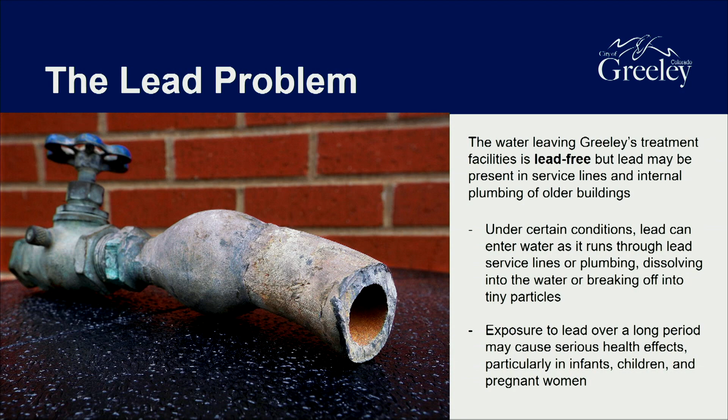So yeah, as Michaela said, historically some of the water service lines in Greeley do contain lead. And just to really point out that if you have a lead service line, that lead is not necessarily leaching into the water. It happens under certain conditions. But obviously we'd rather not have lead pipes there in the first place, so that's not a possibility.

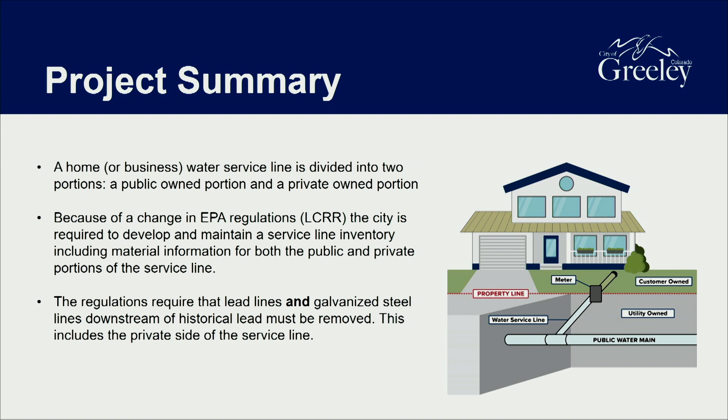So because of a change in EPA regulations, the lead and copper rule, the city is required to develop and maintain a service line inventory, including material information for both the public and the private portions of the service line. So historically, we do not have records for the private side of the service line because it belongs to the homeowner, but now we're required to do that. So the regulations also require that lead lines and galvanized steel lines downstream of historical lead must be removed. This includes the private side of the service line where it hasn't been done before.

And just a heads up on the galvanized steel. So the galvanized steel can absorb lead and then re-release it in the future. So that's why the galvanized steel has to come out as well if lead was previously upstream of that galvanized steel.

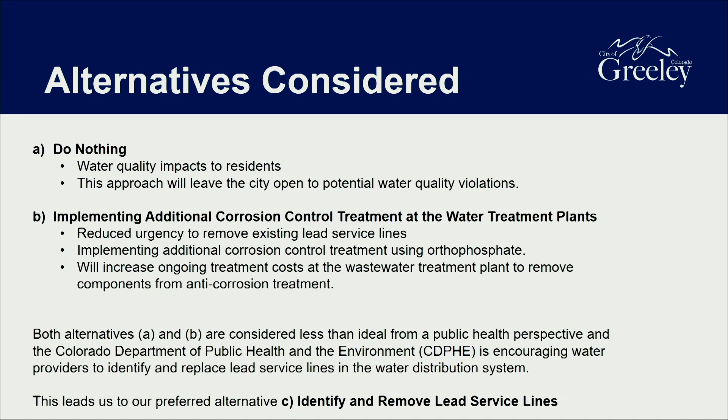Essentially, both these two alternatives are considered less than ideal from a public health perspective. We're essentially being encouraged to identify and replace lead service lines in the distribution system. So our preferred alternative is to identify and remove those service lines. Okay, so here we go, the preferred alternative.

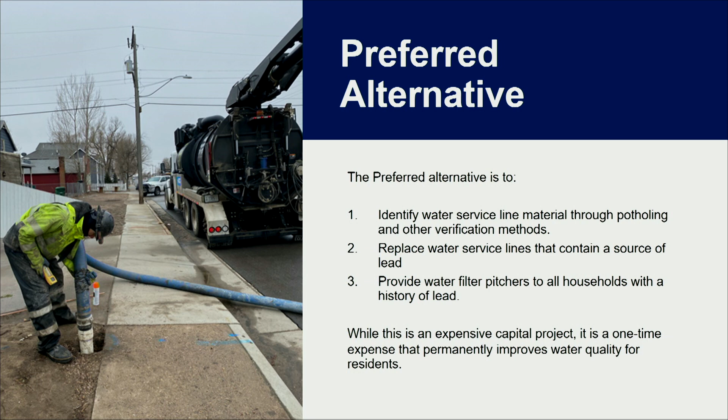To protect public health during this process, we are providing water filter pitchers up front to all households with a history of lead. And while this is an expensive capital project, it's a one-time expense that permanently removes those lead sources from the system and improves the water quality for residents.

So the map you can see now outlines our preliminary plan for potholing and doing removals and replacements for service lines. You can see the small bubble there in the red area is where we've completed potholing already, and we're now moving on to the replacement phase for that small bubble. But beyond that, we're looking to do the red color phase in the rest of 2023, the green area in 2024, the blue area in 2025, and then the rest of the city later on in 2025. That's if we have the funding in place to move at that pace.

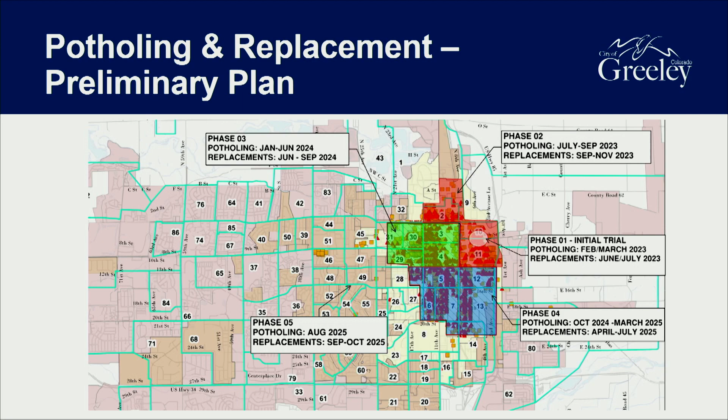So looking at the budget, if we have the necessary funds, this will be a 3-year project costing between about $19 and $23 million to do the potholing, to do the replacements. So the vast majority of that money is in replacements. It's $15.8 million, around $4 million for the potholing, and then around $1.6 million in other costs.

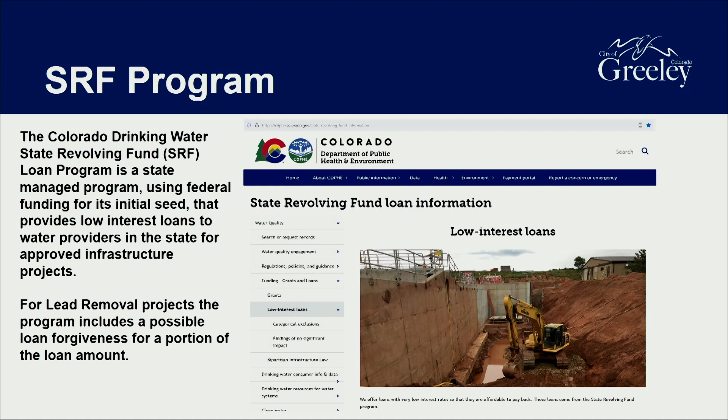So to help offset some of these costs, we are pursuing funding through the Colorado Drinking Water State Revolving Fund Loan Program. This program is managed by the state to distribute federal funds and essentially low-interest loans to water providers for infrastructure projects. For lead removal projects, the program does include a possible loan forgiveness for a portion of the loan amount, which will help us save some money, hopefully.

In terms of projected rate increases for this project, to fund the preferred alternative of removing lead service lines, it would require a roughly 3% rate increase, and that would be assuming we do not get any loan forgiveness through that SRF. In comparison, I believe it was alternative B, to install additional corrosion control treatment, that would actually drive a rate increase of at least 3% on the water side and an additional 0.5% or more for wastewater to remove those additional nutrients.

With the SRF loan, we would essentially be able to reduce the rate needed to 2.5%. Either this, or we could also use those funds to invest in other capital projects for cost saving.

So this construction project is, by its very nature, in the older areas of the city. The older properties are the ones that are more likely to have a lead service line. And so construction will be in areas of the city with historically significant buildings. As such, the State Historic Preservation Office, or SHPO, as we've been calling it, will conduct a review to determine the effects on historical properties and archaeological sites, and may seek alternatives to avoid, minimize, or mitigate these. So the city will be having someone do this historic investigation, and then we will be using approved methods to mitigate the risk to historical buildings.

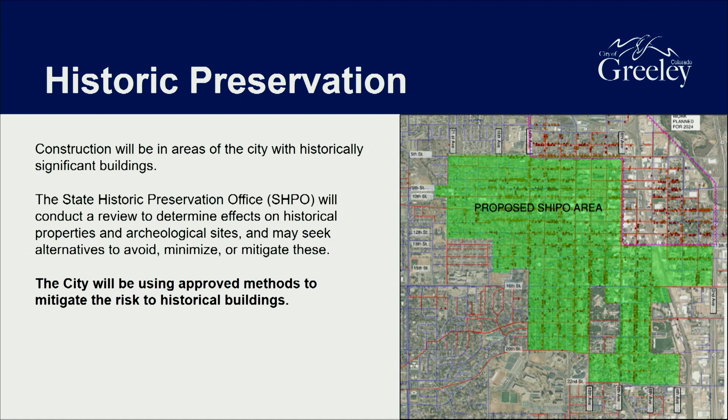And then in terms of environmental impacts, this project will have a minimal impact on natural areas. The project is exclusively in urban areas that have already been developed and disturbed from their natural state. So we're looking at the service line that's between the road and the property. So we are digging holes in the road or out the front of a house where the land has already been disturbed and developed.

So in summary, the preferred alternative that the city of Greeley is pursuing is to identify and replace service lines that contain a source of lead. This project is expected to take a number of years, likely 3 to 4, depending on funding. We will provide those homes we determined to be most at risk with a water filter up front and replacement filter cartridges until their line has been removed, and then 6 months following.

This project is expected to cost approximately $21 million, and we are pursuing state funding through the SRF program to reduce the cost to ratepayers.

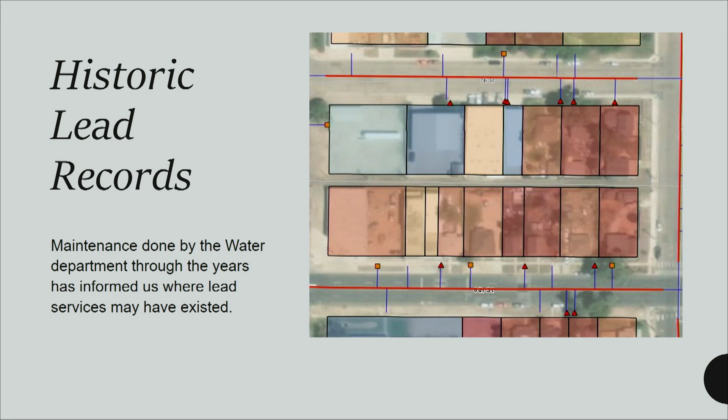This layer's spatial data is created from the efforts of the water shop going through and replacing lead as they found it, as they were doing other projects. So if they were going through and lining a water main, they would record when they found lead and replace it. This has been important for us to know areas of the city to target as we continue expanding our initial phase one area, just knowing where we may find lead by knowing of its existence in the past.

We have found a correlation between how much your valve turns to the stop box going to the meter and potentially the material that lies within. If a valve turns 360 degrees, we have about a 92% chance of that being lead. If it turns a quarter turn, then most likely it's made out of copper or a safe material.

We are currently using Field Maps, which is a mobile application that our field crews can use on their phones to track this data in real time. So as they go out into the field and turn valves, we have up-to-date data as it comes in.

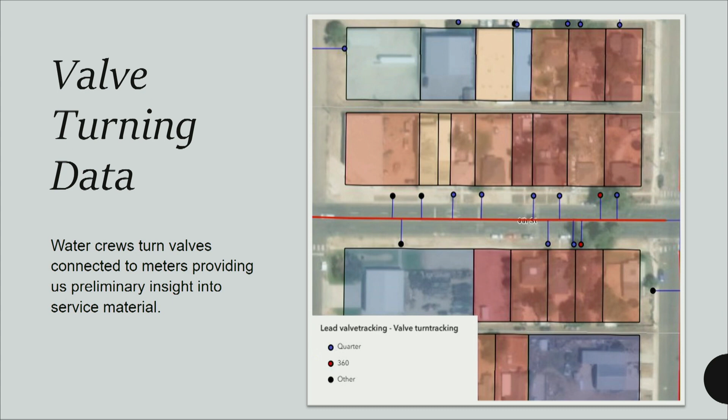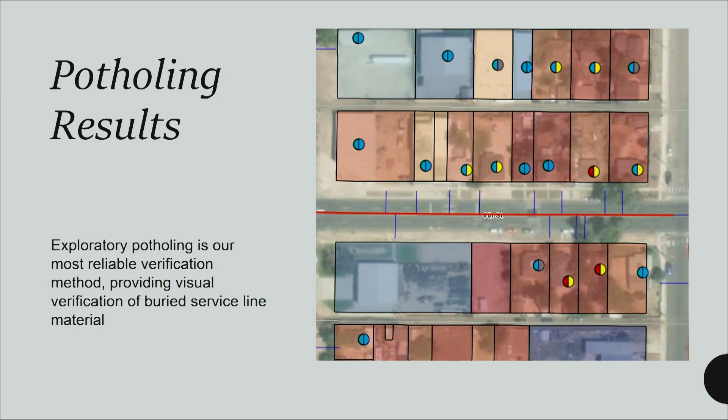And lastly, all of this data culminates into our last spatial data set, which is the replacement phase. We use these maps to identify hotspots, streets that we can disturb only once by replacing as many services on it as are needed, and just using the data that we have to inform our decisions. It is my hope that by the end of this project, everything is blue and green and very boring.

Our last and probably one of our biggest initiatives right now is the material survey. We've mentioned it a few times, but it is also an application or a web-based survey that anyone can do on their phone or computer. It is important for us to gather information on the customer side of the service line, an area where we are right now sorely lacking information. As many surveys as can be submitted is welcome. We would not turn down the opportunity to have that data.

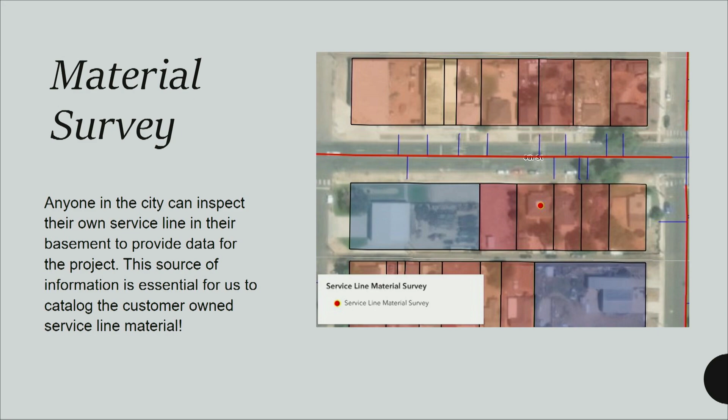If you have questions about what your material is, then the survey itself walks you through identifying your material, even if you're not sure about it, different tests that you can do to see if it's lead or a galvanized steel or just a copper pipe. You do not need to be the owner of the property that you're living in order to fill out the survey. Just having the data is enough for us.

We also have a QR code which is distributed on many of our pamphlets, letters, material that we hand out. By taking a picture of this QR code, it will take you to a website where you can fill out the survey. And I'd like to walk you through that survey right now. So when you come up to the survey, I'm just going to give a short demonstration of how it works. We have options for both English and Spanish, which have been translated through the city. We'll go through the English selections, because that's what I understand.

You'll have a very short introduction to the survey, introduction to the project for those who are not familiar with it, and the importance of why we are doing this. We have graphics to kind of tell you if you may live in a home that is prone to lead services.

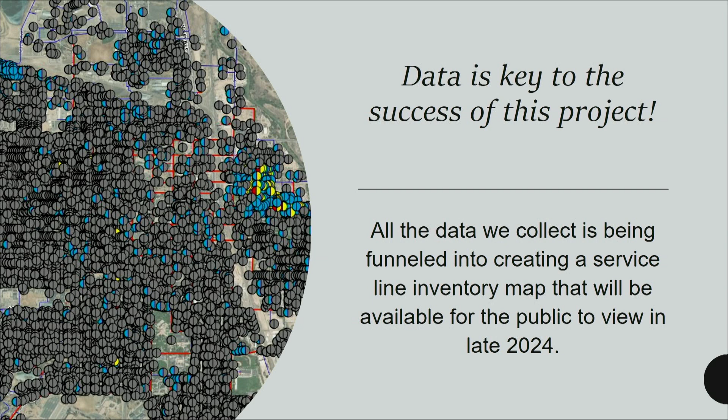Just kind of further touching on it, anyone can submit it. Please, if you have friends and family that live in Greeley, encourage them to fill it out as well. The more data we can collect, the better. There's no such thing as not enough data, because data is truly the key to the success of this project. We will make the decisions for the safety of our city based on the data that we collect. We are developing this service line inventory, and we will be making a public map available so that anyone in the city can view the progress of the project and service line material towards late 2024.

Okay. So is this like a federal thing that all of a sudden everybody's looking at the water? Or it's just come to the attention because there's such an explosion of people, you know, coming into Colorado, and it's hard for the systems to keep up?

So it's a combination. Since the Safe Drinking Water Act was established, it's kind of started there. Originally the lead and copper program was established then, and it monitors water quality. Throughout time since that was created, we monitored the water quality and ensured that it was safe drinking water. Since the 1990s, when Greeley found lead, we removed it out of our system, and that was on the public side of the system. This latest is due to anticipated changes to the Lead and Copper Rule, which will require lead to be removed from the system on the private side in addition to the public side.

Okay, and I'm sorry, the very first part when you said that it was being established, were you here in the 90s? Like on this panel, no? So you just walked into this? Correct. Congratulations. Okay, so